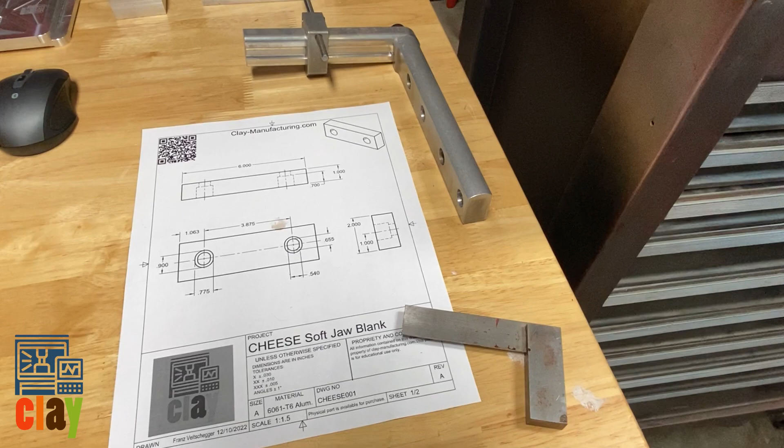Franz here, Clay Manufacturing. I was getting ready to do some test cuts because I'm planning on making some soft jaws, and this is going to go on the website. And I thought, you know what, why not kind of go over the process of how I just mark my material, what I use to make lines with, the material, where I get it, what size I start with and why, and what I actually use to cut the material, and hopefully a finished product.

So why am I doing this test program? I'm trying to make some soft jaws because I'm working on the Wasabi Speed Wrench project. This is the next one I'm going to post for free.

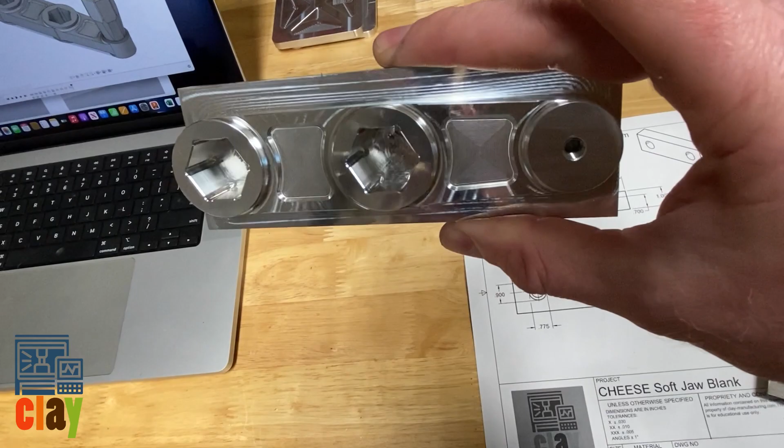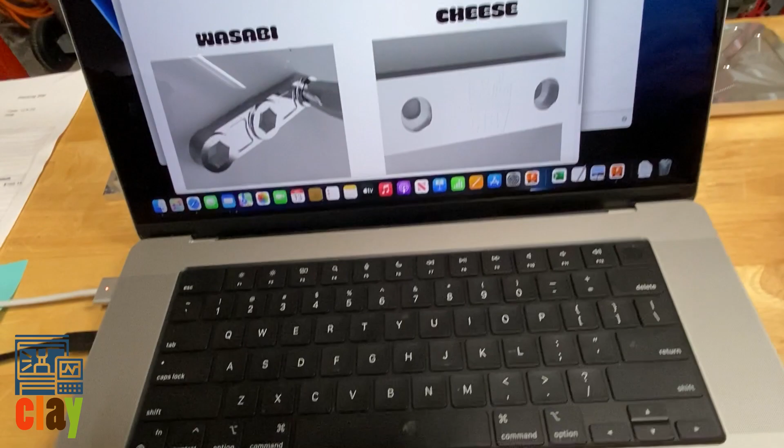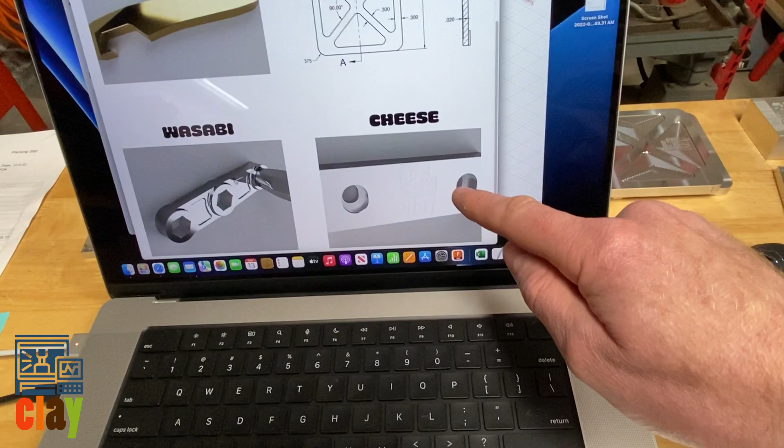This is a work in progress. I have, as you can see, the top side machined. I haven't released the video for it yet because I want to make sure everything's proofed out. And then right now I'm also going to do soft jaws, because to do the back side on this puppy, we're going to make soft jaws. So we'll have to machine a cavity, flip it over, stick this puppy in it, and machine this hat off and the features in the back side.

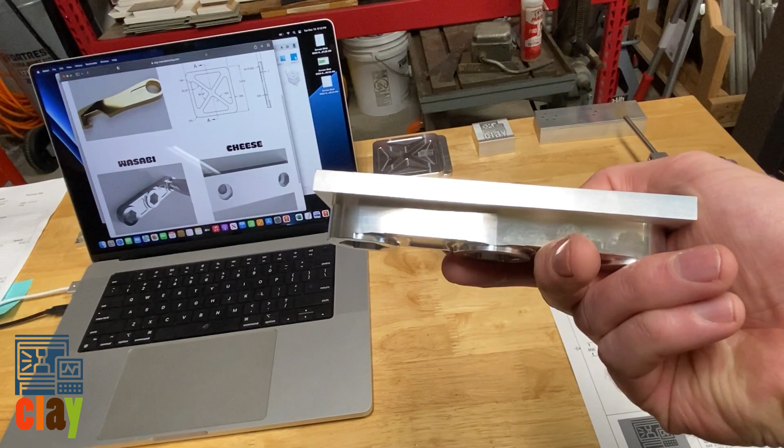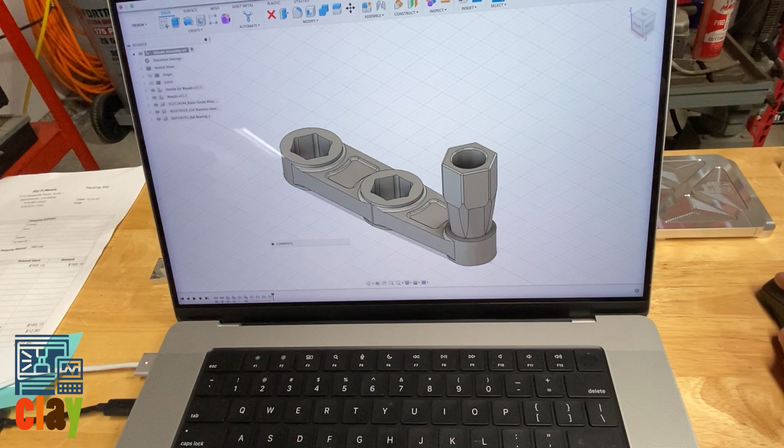So before I release this, I need to make some little soft jaws. These are just blanks, and then we can get to making our whole assembly right there. Let's hop on over to Fusion. So this is in Fusion. I'm going to close that out. Let's make this a little bit bigger, and let's look at what I'm doing. Here is my soft jaw blank. I'm going to very soon, within the next few days, post a CAD and CAM tutorial on this one.

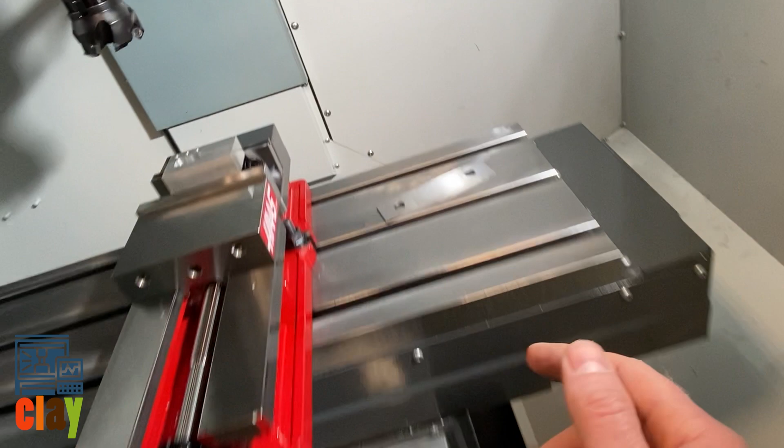On these soft jaws, it's very typical to do a little slot back here. If you look, I still have my old thing in here, darn it. If you look at a Kurt vise, this is just a counter bore, it's not slotted, so I can't take a hard jaw and flip it over. The hole won't align with the bolt hole. So when you put a little slot in there, you can use both sides of these soft jaws. This is nothing new. I'm not a genius for doing this. I'm just kind of explaining what I'm doing in case you haven't seen this before.

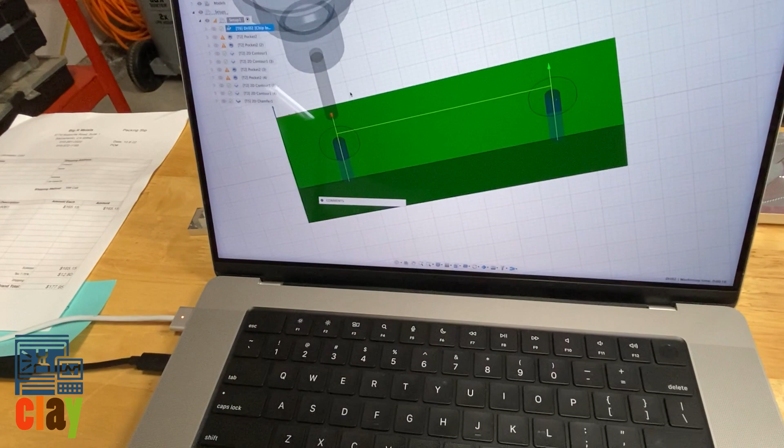I've done it plenty of times on HAAS VF1s, and I'm going to do it with my mini mill, so I had to change some feeds and speeds. I'm trying to really keep it simple. I only have a 10 tool changer, and I don't want to have a bunch of different tools. So ideally, I would have a 1/2 inch drill, but I don't have a 1/2 inch drill, and I don't want to change it out and buy one. So I'm going to use the biggest one I have in the machine, which is a 250. So I'm going to pre-drill it.

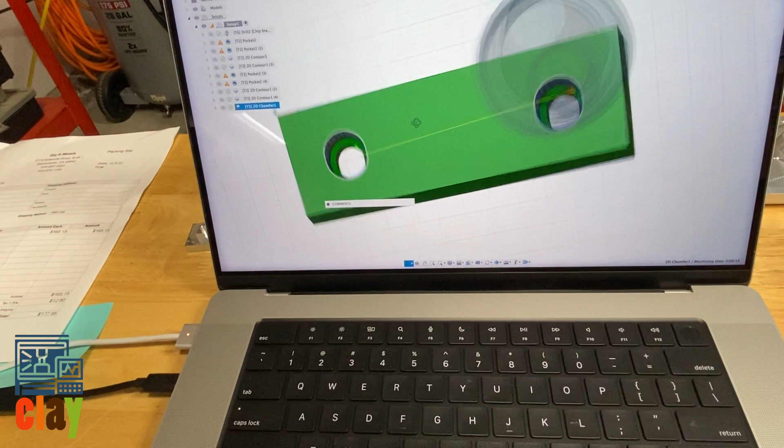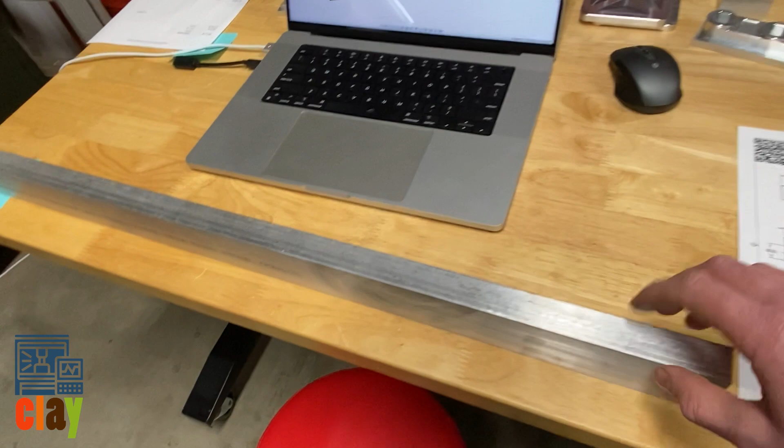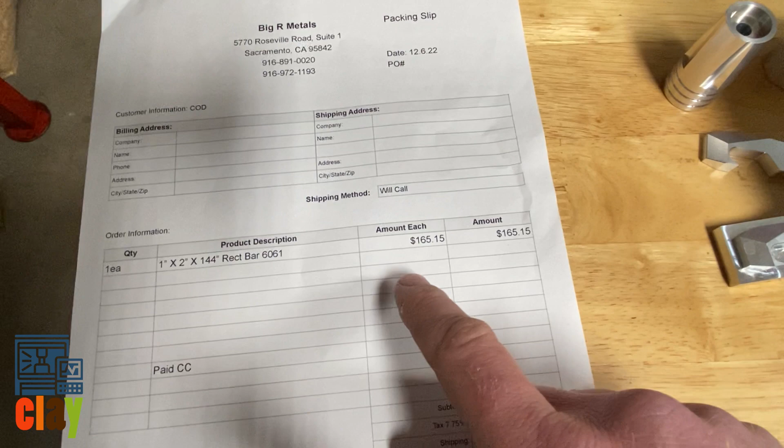Then we're going to pocket it out, and then we're going to do a contour, and then when it's all said and done, we're just going to have some slotted counter bores in this extruded aluminum. Now this extruded, this is 1x2. I bought it from a local supplier, Big R Metals. I bought 12 feet of it. They cut it. At the time I had a car, so they had to cut it in a couple pieces. They didn't charge me for the cut. The total price was $177. And they were very awesome to deal with. And this is one of the pieces that are cut. And I'm going to cut it down to 6-inch lengths.

My soft jaws, these are kind of what I'm also going to call quick and dirty soft jaws. The only machined features I'm going to have are these pockets right here. I'm not going to clean up the top. I'm not going to clean up the saw cuts. I don't need to, and in other videos I'll explain why. All I'm doing is I'm going to cut this thing down to size, and then I'm going to drill those holes in it on my machine.

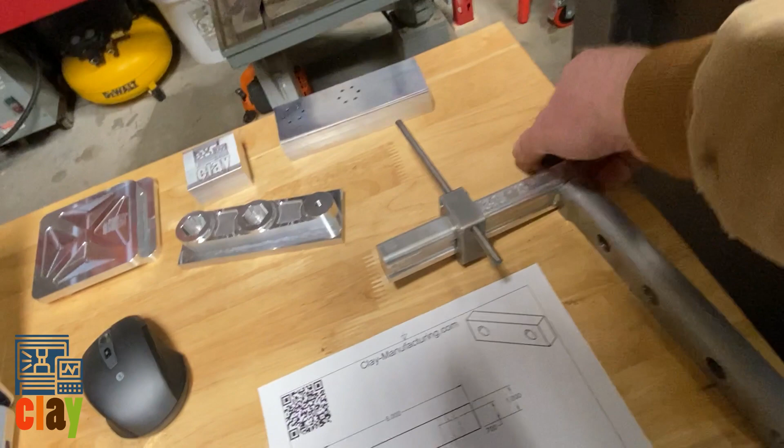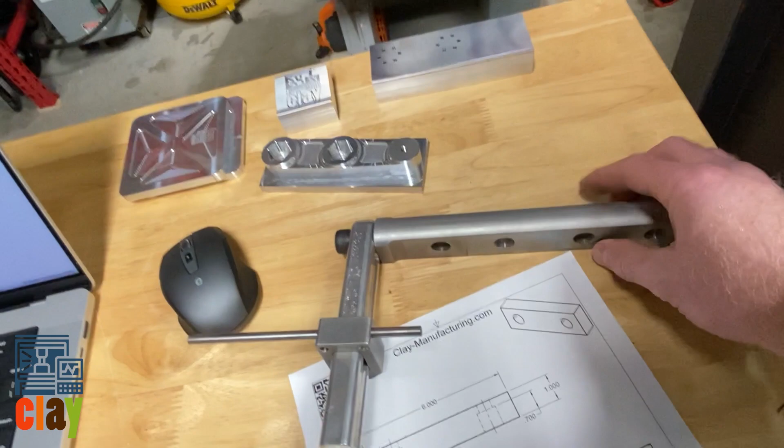This is a part I made too. I might turn something like this into a project. I did kind of mimic the design of Edge something. So if I post a similar project, it won't be one to replicate what Edge is doing. But this is a work stop I made.

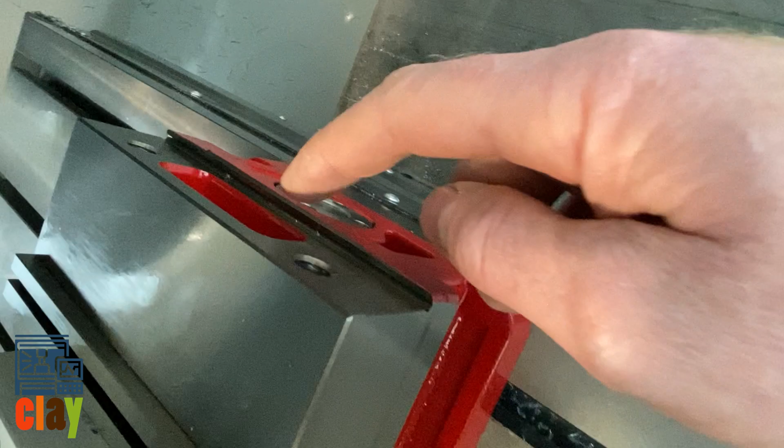This bolts to the back of the vise. This is my X stop. And that will go back here on the vise. And I'm going to set it up so I don't have to refind my X. Now on a mini mill, when you have this bolted to the back, you need to be careful, because if you go all the way Y positive, it will crash into the sheet metal.

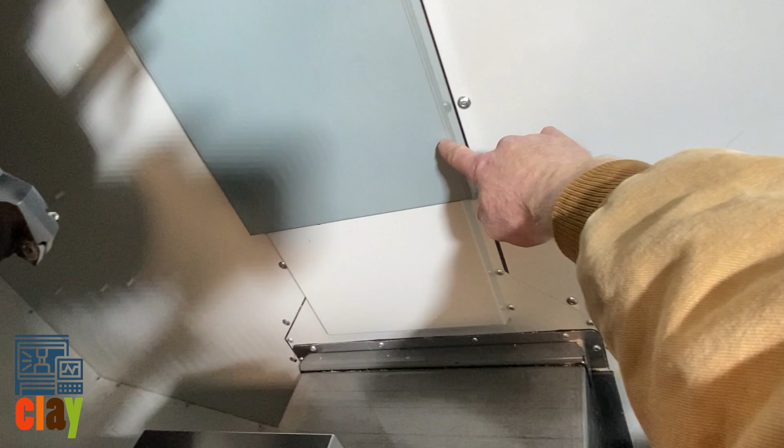As it is, this vise barely fits in here, this full-size Kurt DX6. So you got to be careful with that. And let's see, what else? All right, how am I going to measure this out? I'm just doing onesie, twosies cutting, so I'm going to do the slow Neanderthal way.

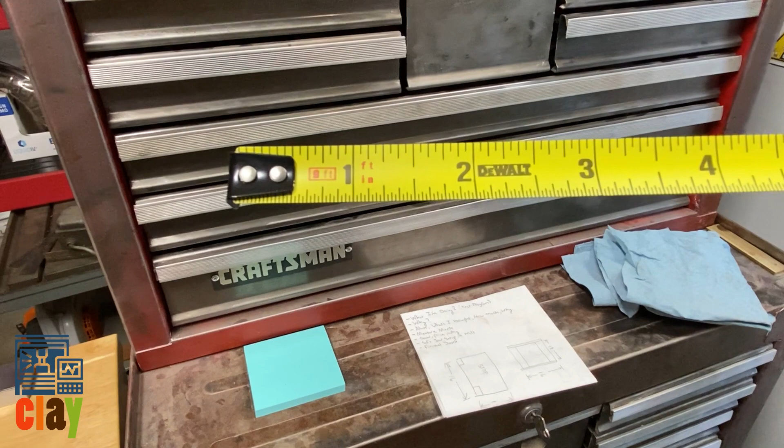I have this cool little DeWalt tape measure. I love this little guy. It's got a magnet on it. The units are in inches on both sides. I do like Milwaukee, but they have one side that is metric and the other is imperial. I prefer imperial because that's what I use.

Plus, it's the only measurement system that matters. Am I right? Am I right, people? JK. Okay, let's see if I can do this with one hand.

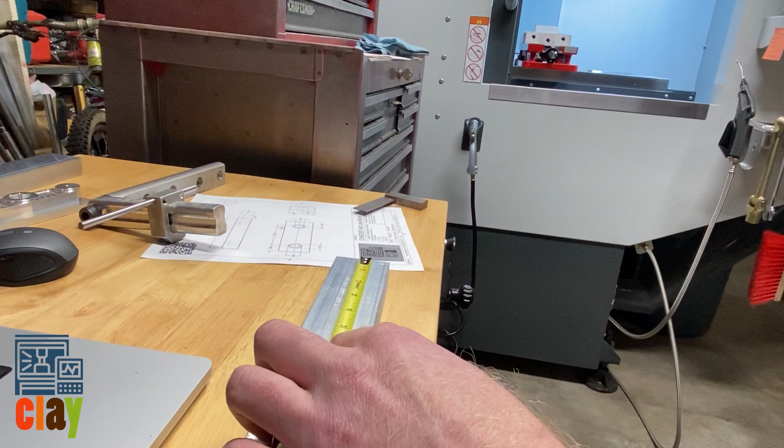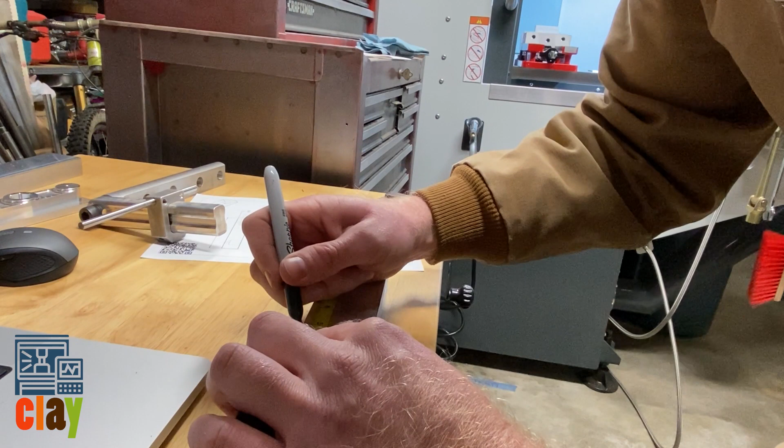Let's put you through this. I'm going to do 6 inches. And it's best when you cut in the saw to lay it flat. It kind of takes out the inconsistency of the saw. What I'm doing, since this doesn't have to be super precise, is I go to my 6-inch mark, and right on that graduation, I put my Sharpie mark right in the center line. I put it right in the center line of the graduation.

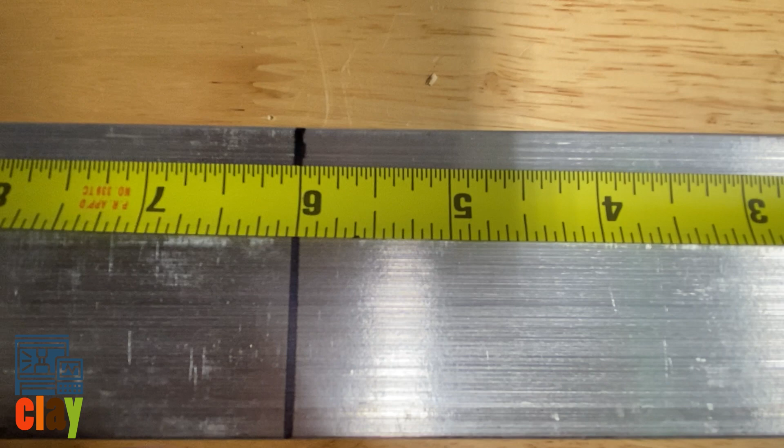And then I take my little square, and I'll just follow. I'll create the line based off of that little mark that I made. So here we go. We have my line at 6 inches. Let's see. I did kind of a bad job. You see my little dash I did was right. I try to put the center of my Sharpie in the center graduation mark. I might kind of make it a little bit thicker, but honestly, if I'm plus or minus 100 thou, I'm okay with that. So this is pretty good.

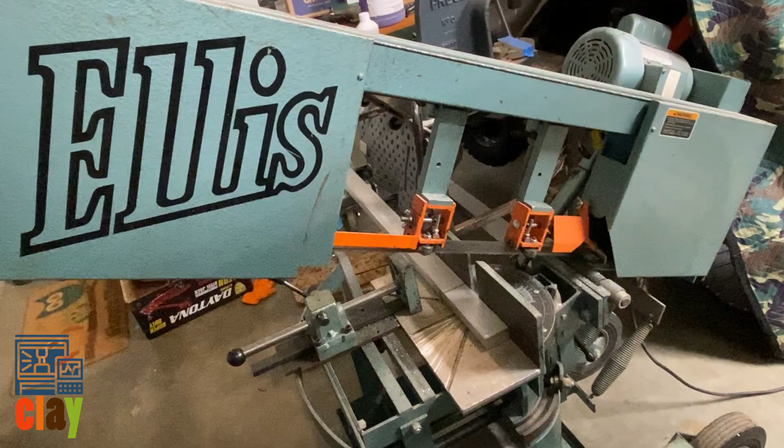This is my bandsaw. It's a horizontal bandsaw. This is an Ellis 1600. This thing is awesome. My friend Mike, he found it for me on Craigslist. It was 15 or 1600 bucks. I want to say 1500 bucks. It's a little beat up. It makes some weird noises, but these saws are phenomenal. If you can't afford an automated saw, this is very good. This is the best manual saw I've ever used. And this one, it was a little beat up, but it's worked fine.

So here we are. Here's my little kind of outfeed. Now, if you're doing a ton of parts, you really need to have a stop that's clamped here or a stop that comes out and holds your position so you don't have to mark off each one, because this is not super efficient what I'm doing.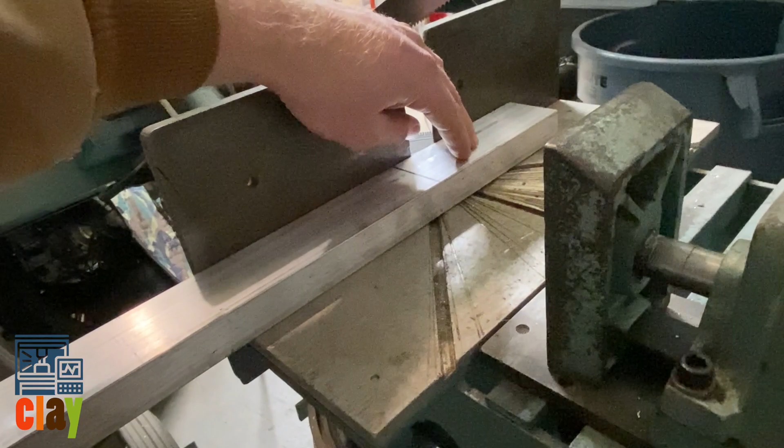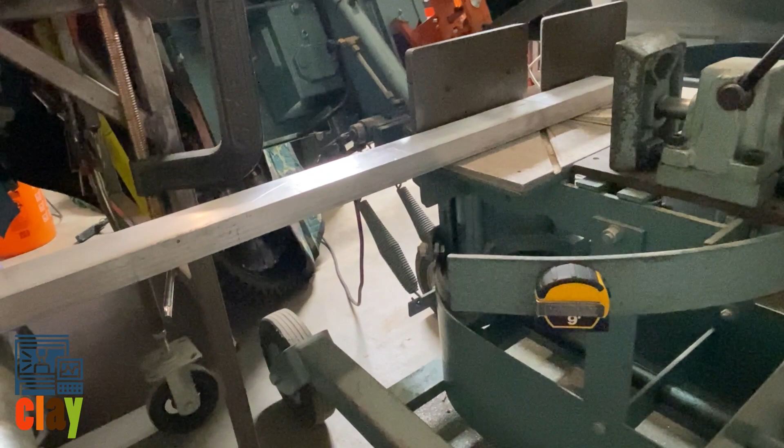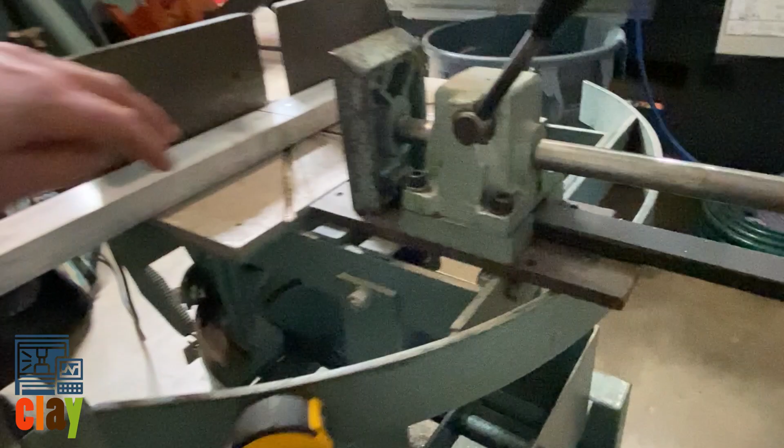What I did is, before I started filming, I set this roller so my part, if I push, I can push it down a little bit right here, and I know it's flat on this material. If I went too high with this, and I couldn't push down on the end, then I'm going to be cutting at an angle. So if anything, I'll err on having this roller a little bit on the low side. So when I rest my blade on here, it will push it down and make it flat. And I'll try to show you what I mean right now.

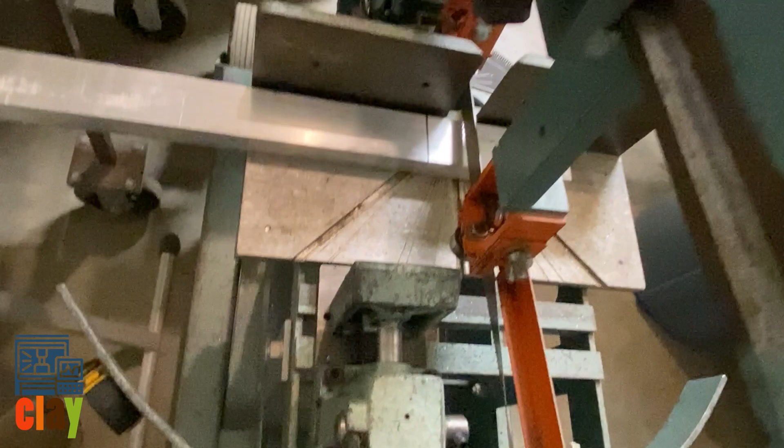Maybe. We're working with this jobby here. Okay. This is more difficult than I thought. I'm going to release all the pressure right here so my saw will drop. And I'm doing this one-handed, so it's not ideal. Let's see if we can get you in position. And with the magic of movies, we'll speed it up. All right, there we go.

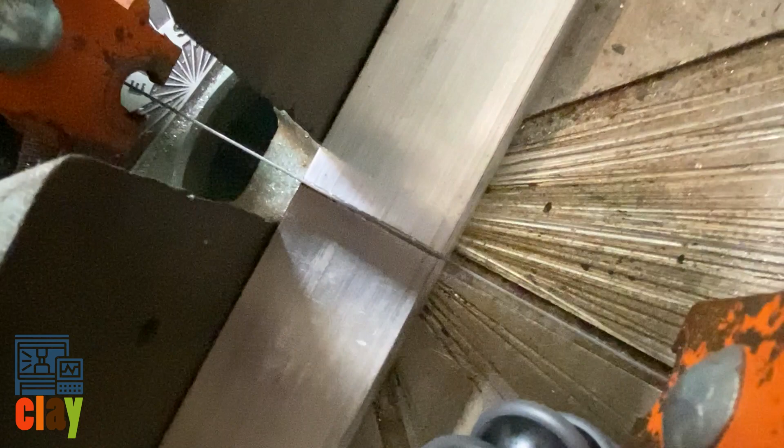So I'm going to lift this up, slide it over, and if I set my blade right on the center like that, it's going to make my part too thin, because there's a kerf there. It's going to remove, I don't know, probably like 50, 70 thou in width. So I want to make sure I go to this other side and make sure that the very furthest part sticking out of one of these teeth is going to be in the center line of my part where I drew where that graduation mark was.

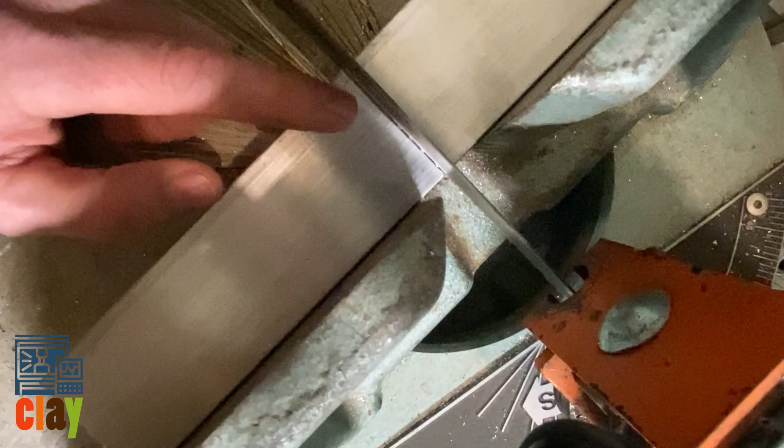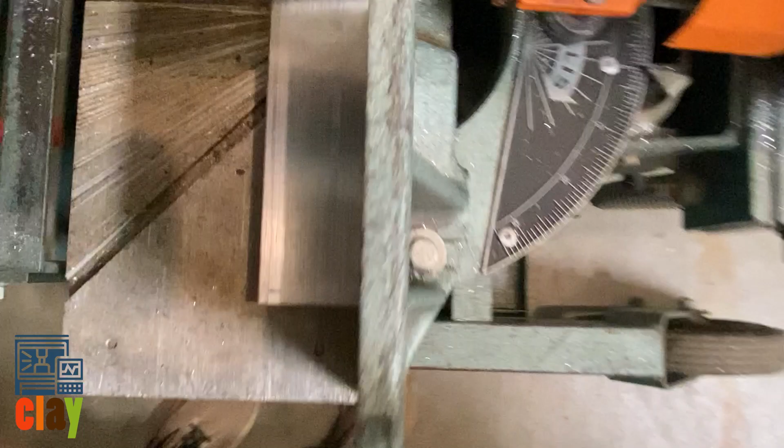So right now, it's too far over. It'd make my part a little bit short. Let's see if I can fiddle-faddle with this a little bit more. Now I don't cam that over all the way. I just put some pressure on there. It doesn't need to be super tight. And as you see right here, the part of the tooth that sticks out the furthest is right about on the center line of that Sharpie mark.

And with this thing, I'll lift the blade up off the material. I'll turn it on. And then I just gently lower it on the stock. And I can adjust the down feed rate with this knob right here.

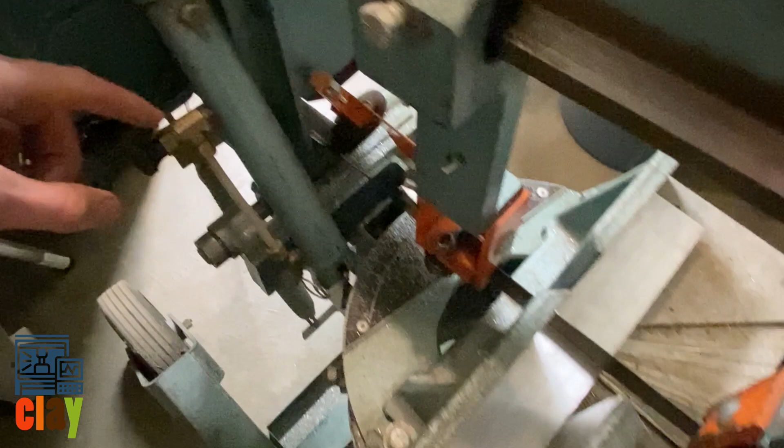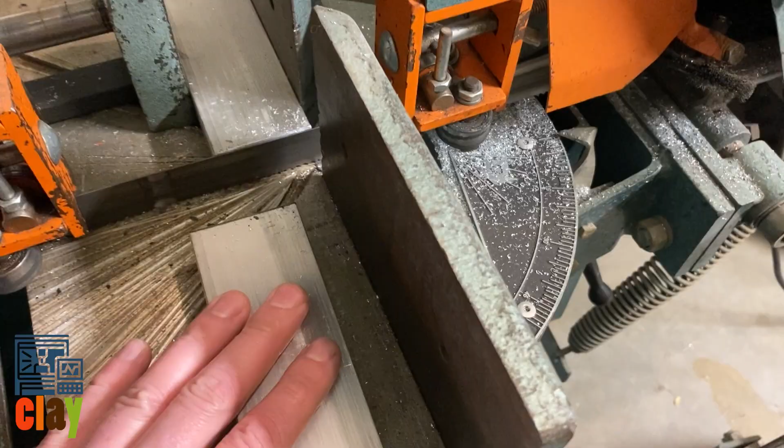This is our complete cut, and now I can just remove my part. 6 inches on the money. I can usually cut within about 10 thou on that saw. Right here I was a little heavy, I was 6.019, but that's pretty dang good for a manual saw.

Next up, I gotta load this onto the vise. I will mount it to the back. I'll find my X, my Y, and I'll find my Z. I almost forgot. I totally need to cut another one. I know you're going to think I'm lying, but this one was 6 and 13 thou.

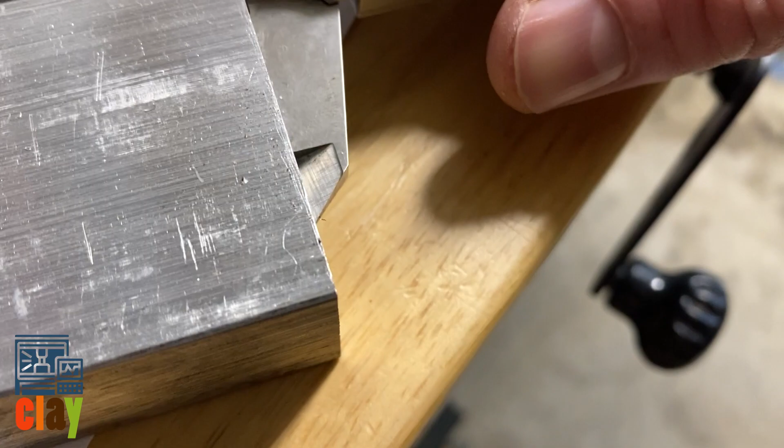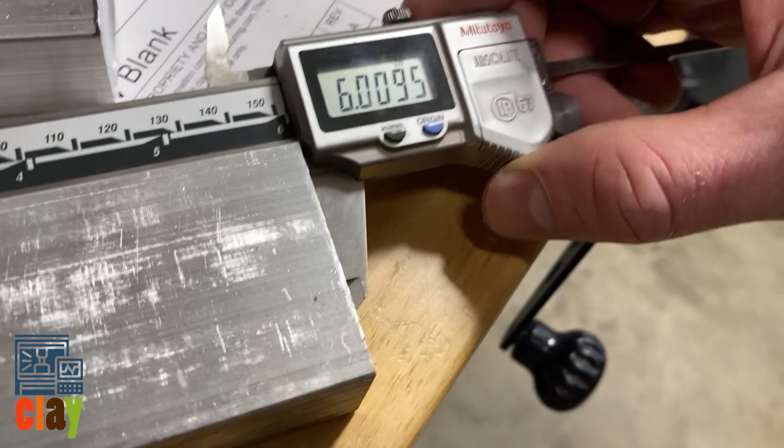If I could, and put it on there. Whoa, actually. I know I'm not measuring it super awesome, but that one's like pretty good. I was reading a little higher earlier. I don't know. I'm not getting a very good accurate measurement with one hand. This one's a little bit smaller. My point is, that saw is dang impressive if you just take a little time in setting up your cuts.

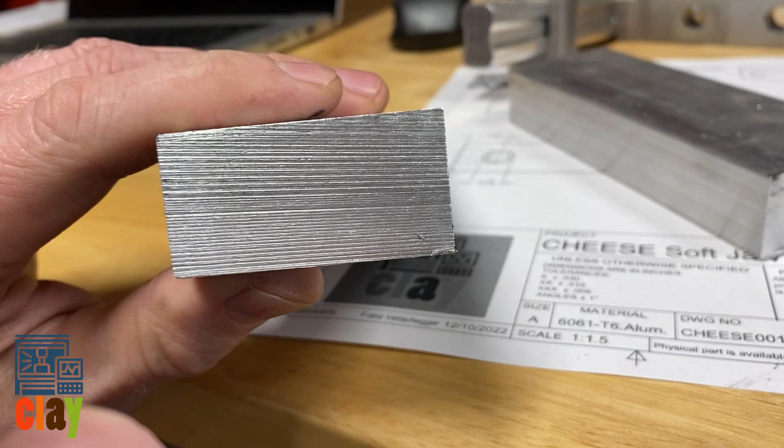And I want to show you how beautiful the cut is as well. This one, I went a little bit faster on this side. You can see a little build up in here. This is the other side. So this is my second cut. This whole piece is my second part. So basically the first cut you saw, this is the other side of that cut.

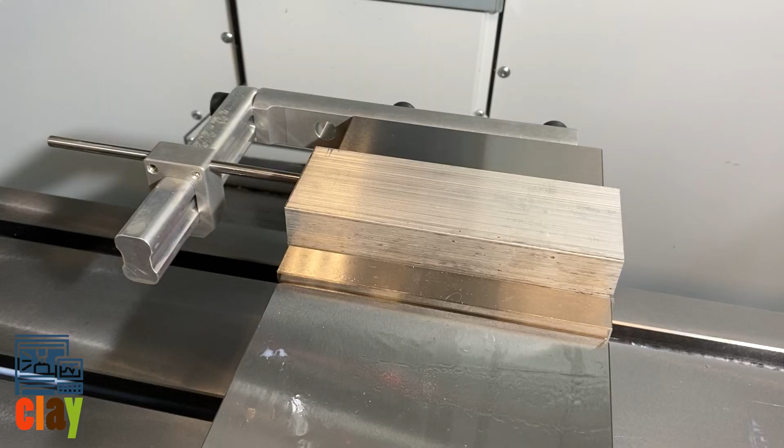And this is from the metal supplier. I think they use like one of those carbide tip saws that rotate real fast that are scary as heck. Now I'm just going to deburr those things, set them up in my machine. My next part will be machining them. Here is what the setup looks like.

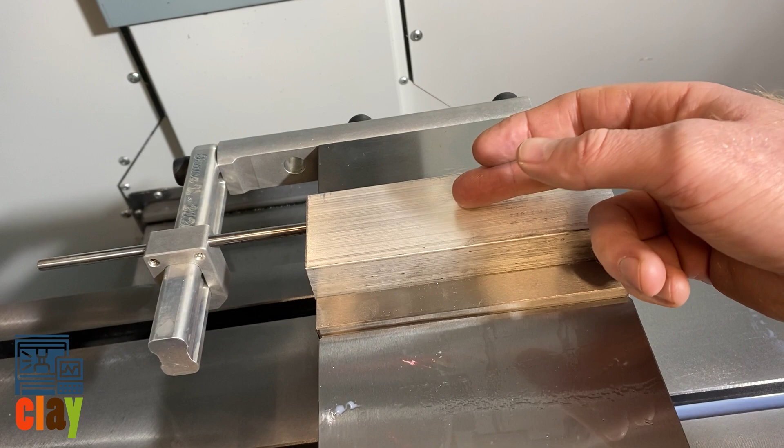So when you put a work stop in, I like to mount the work stop first, get everything tightened up, get it all lined up while this part is still loose. I get all this tightened. Once this is all tightened, I then slide my workpiece into the stop gently. I hold it down while I tighten the back of the vise. And then I just gave it one little tap with a dead blow just to seat it on my parallels over here. Yeah, right there and there. And that is what the stop looks like.

And now if I jog my Y too far positive, I will smash this right in the sheet metal. Right now you can see I haven't done it yet, but if you see me in the future and it's all gouged up over there, you know what I did wrong. And let's see, the only thing with a work stop, I need to chase this thread all the way through. I have a set screw over here and they're little 1/8 inch Allen, so I'm going to probably make a new one that either just mounts to the table.

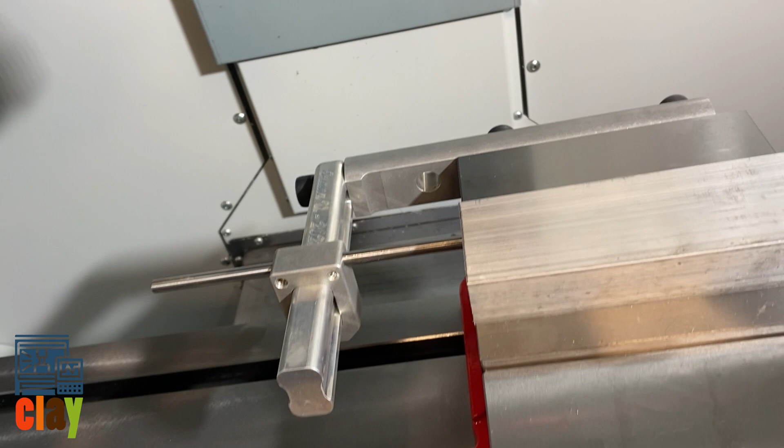But the nice thing about something like this versus the Kurt one, which I love, the ones that sit in this groove, I really like them, but when you have a piece that takes up the whole length of the jaw, you can't use it. So you either need something that mounts to the back of the vise like this, or one that mounts to the table and then holds a position.

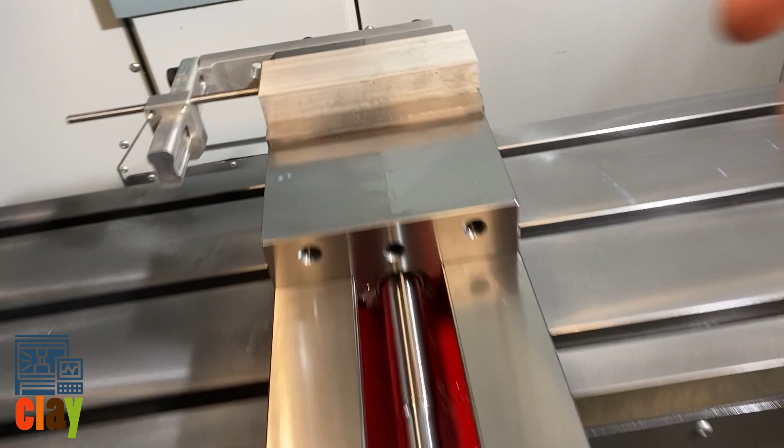The only reason I'm putting a stop up is so I don't have to touch off X again. And honestly, with my Haimer and the time it took to build all this, it actually would have just been faster to set it with my Haimer, but whatever, we're learning here. And yeah, so the next one is going to be me trying to cut this thing out, and hopefully we don't have any problems. I'm going to about 1 inch and 10 thou.

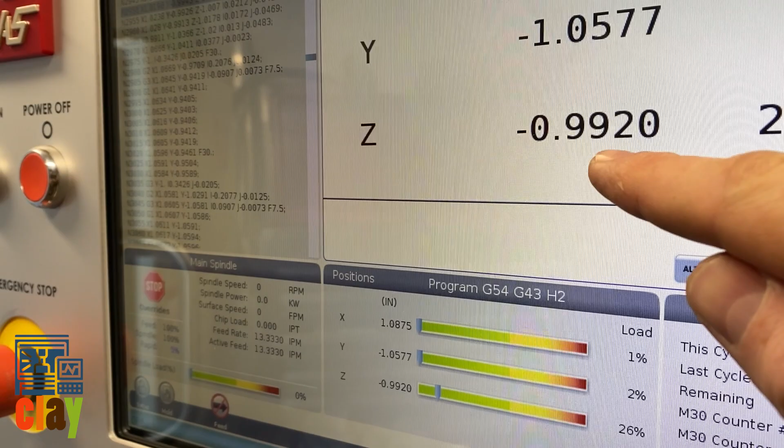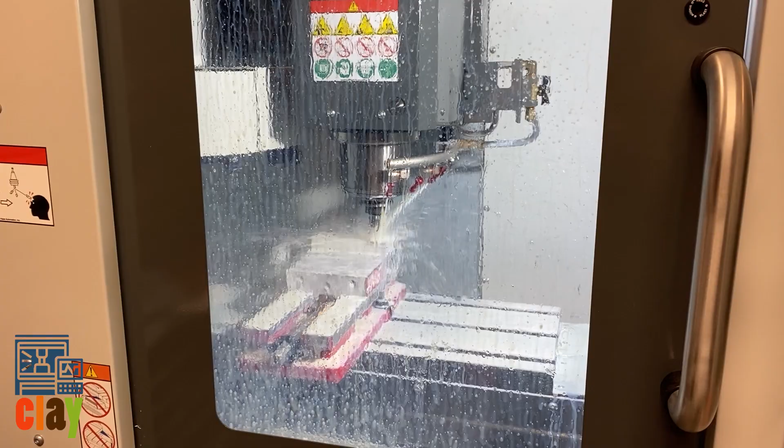Math says I should be right. We're getting there, but it's just, it's scary. Especially the flood coolant, so we'll see how it goes. This is the second pocket. I don't know if you can hear it, but my compressor's going. Someone wanted to hear it run. The spindle on this at 6K has a real high frequency pitch, but yeah, it's not terrible. It's definitely louder than talking voice.

Looking like a soft jaw. I got a couple feeds to tweak a little bit. I'm going at like 30 inches a minute on that big pocket, and it's a little bit fast for how deep I am on this little guy. I'm using a 3/8 end mill. That's kind of my go-to on this. I'm going to make a couple updates, and then we'll run the other one. But everything went okay.

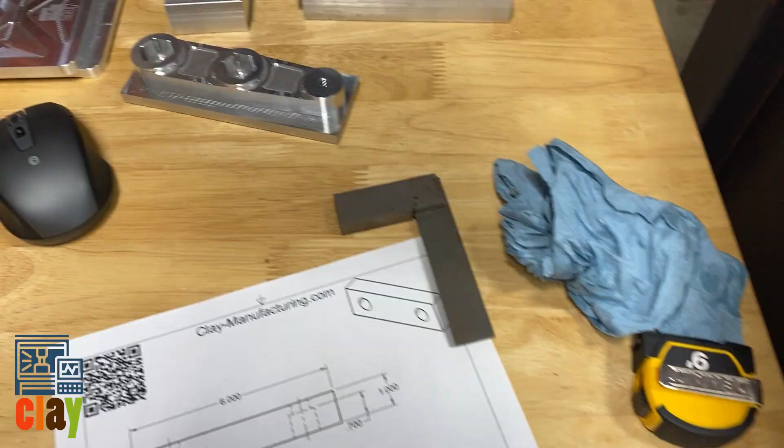This is the first jaw. And then this is the second jaw. I need to run it. And what I like to do when I'm doing these jaws, I'll find whatever surface is the nicest and I will put it down because I want that to be my backside.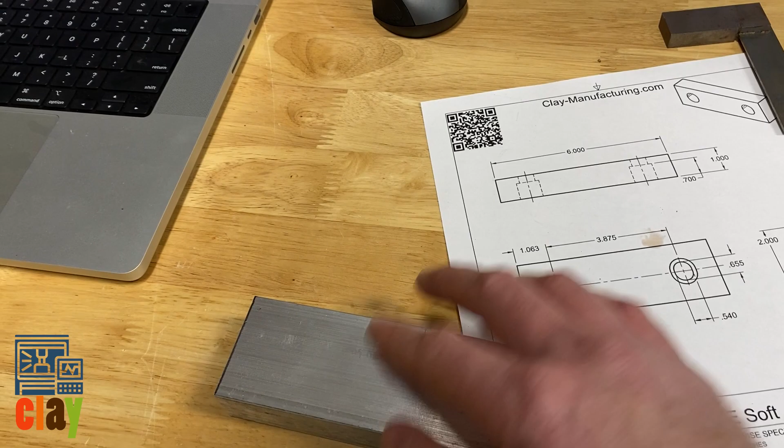So when these soft jaws are installed to the vise, this is the side that's going to come in contact with the vise, so I just look for the cleaner side. This side is going to be facing the part, so if it's got dings in it, it's not really a big deal, because later we'll cut in the geometry that we want in this thing, so I don't really care.

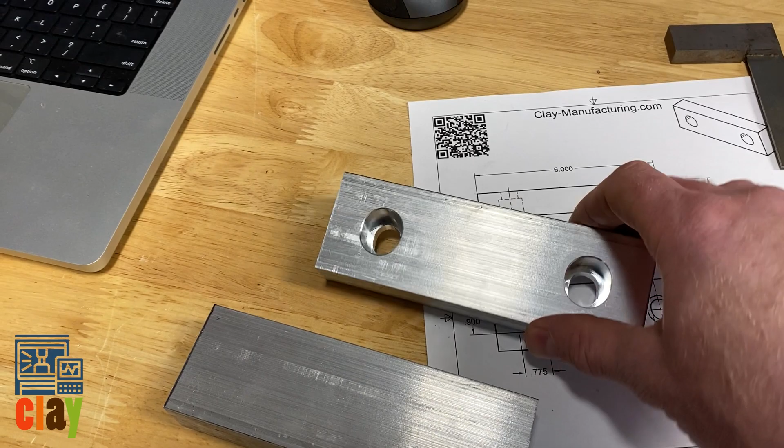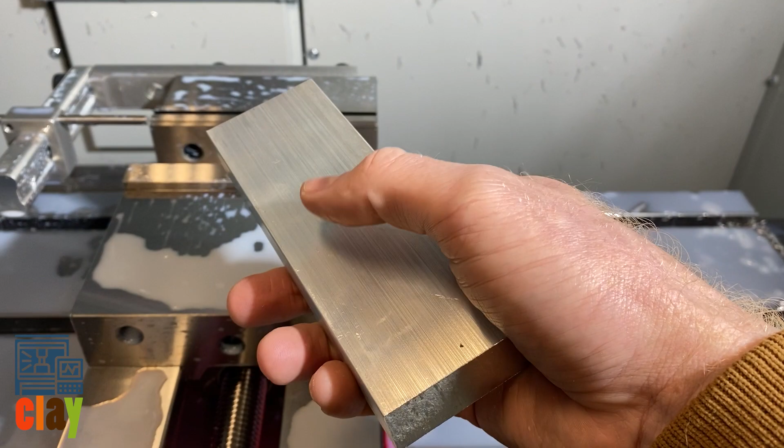Some people will go above and beyond and square it all up. I really don't have time for that, so I don't waste my time doing that. And then we come over here to the beauty of my work stop. I have my parallels in there. I find the prettiest side that has the least amount of damage, because I want that to be on my reference plane. And then this guy will go right in here, and I'll slide it to my work stop. I'll hold it down as I tighten the vise.

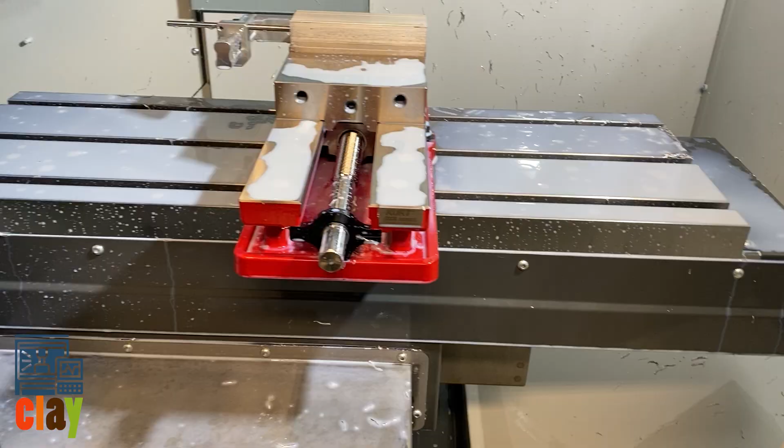I torqued it, and what I'll do to make sure it's sitting flat is I'll kind of pull on the parallel, and if I can feel it slide a little bit, it might have lifted a touch. I don't go crazy with a dead blow. I'll just give it a little tap, because this is an extruded piece of aluminum. It's not machined and precise. So now it's a little firmer where that doesn't wiggle, neither does that one. But if it wiggled a little bit, I can kind of push it, but it's got some resistance.

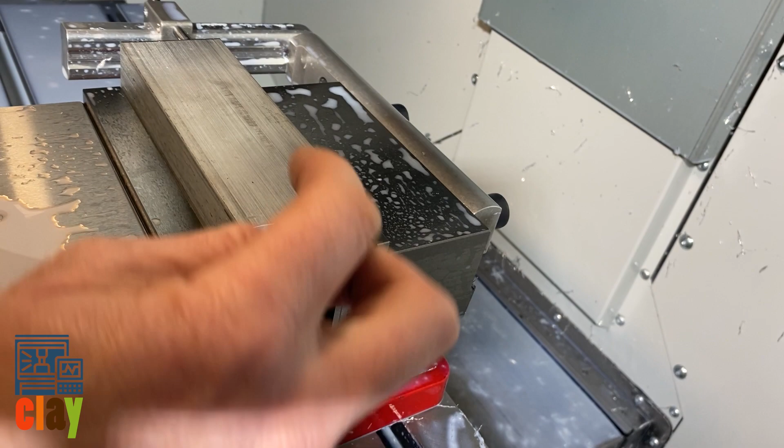You can get a piece of steel banding to act like a spring to keep those spread apart. And it might be a good idea, because if a parallel works its way under here when you're drilling through, you're gonna wreck that drill or that end mill.

I ran the first program. This is my second version. So I'm gonna go ahead, I'll just close this. We will let her rip. I'm gonna come over here. I'll turn it to 50% rapids. It's white, means it's on, it's active, and I'm just gonna go cycle start, and we'll let her rip. It's gonna go grab my drill.

This is a little under 250 drill, but I call it a 250 drill. And I changed the pecking depth on it. It starts to bind up just a little bit at the bottom. This is a high-speed steel drill. It's drilled quite a few holes, so it's probably getting a little dull.

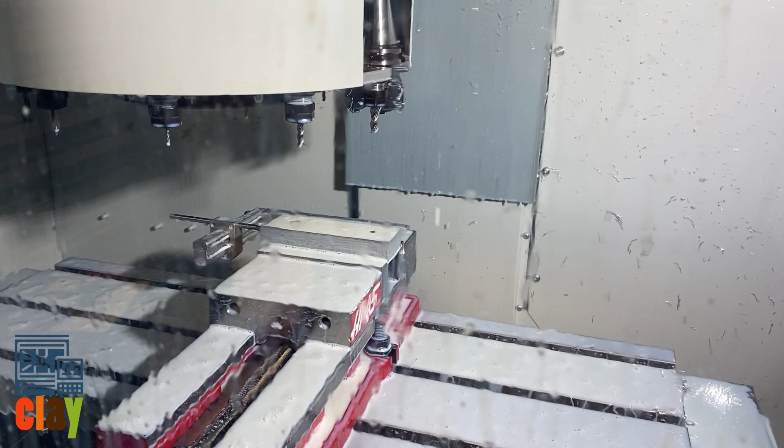Now it's going to call up the 3/8 end mill. And that thing is barely sticking out from the nut, barely more than an inch, so it gets buried pretty deep. And that's kind of doing the helix around that drill hole.

Ideally, you would have a drill hole that's bigger than the diameter of that tool, and you can just plunge straight down and then get into the adaptive tool path. Helixes are extremely slow. A drill bit is far more efficient at removing material straight down than an end mill is. Now this is the adaptive feed rate at only 20 inches a minute.

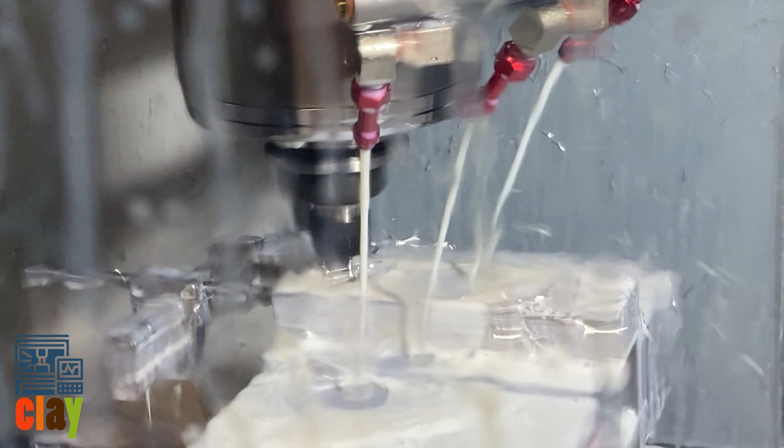This is a chamfer. In the program, I need to edit my post so it kicks my table to the right. I haven't done that yet.

And this is my new one with a few updated feeds and speeds. I am going to post it publicly, so I'll probably tune it down just a smidgen, because it still sounds a little bit aggressive, because it's the surface speed of the outside of the tool, and it's a real small diameter. And so it makes it gall and load it up really easy.

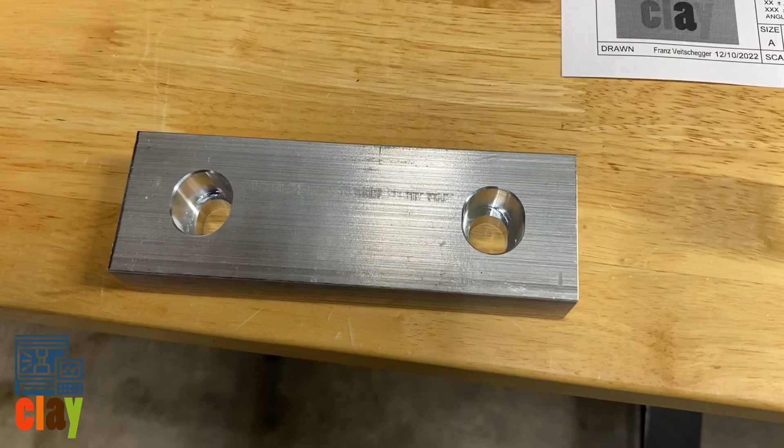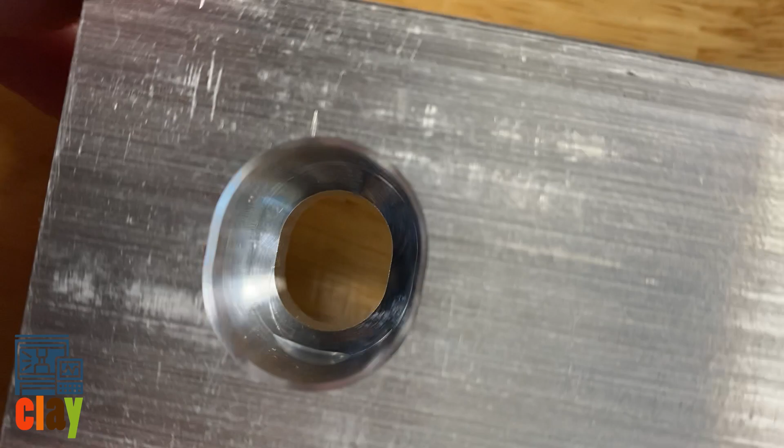Get a little up close look. This is jaw number 2 with my updated feeds and speeds. This is jaw number 1. You can kind of see a little more linear feed rate, the feed lines in there. Still not bad, still looks okay. That's my chamfer. I did a 20 thou chamfer on the top.

Here's the other side. And just for another comparison, I did a pocket, and I followed up with a contour. With chamfers, I try to do a horizontal lead-in radius so you don't see witness marks as much. This is what the back side looks like. And I have not hand chamfered the back.

So this stock actually is 1 inch and 10 thou in thickness. And so I always go like 10 thou past the bottom to make sure stuff gets cleaned up, but I almost didn't go far enough. And my 3/8 end mill is just barely far enough sticking out of the tool holder. But here we go. This is a cheese.

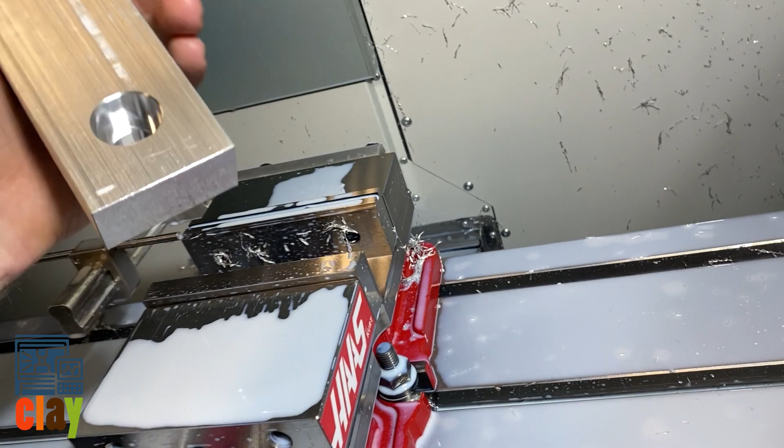I just got to double check. I've made them before. These are slightly different from ones I've made before. This radius is a little bit different than my old one, so I guess I just got to mount them to my vise and double check. But the idea is this jaw will replace that back steel jaw so I can machine my own geometry into it.